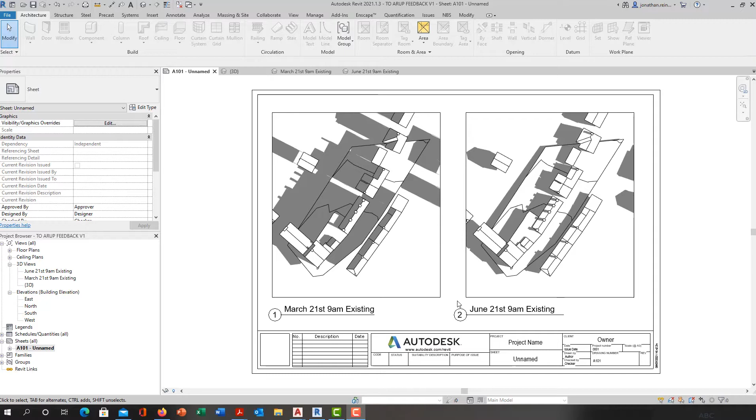The way we create this is, first of all, you need your 3D model of your building. We have our site here generated in Revit, with walls and roofs, just basic geometry created so we know it's casting the shadows. We don't need windows or internal walls for this purpose.

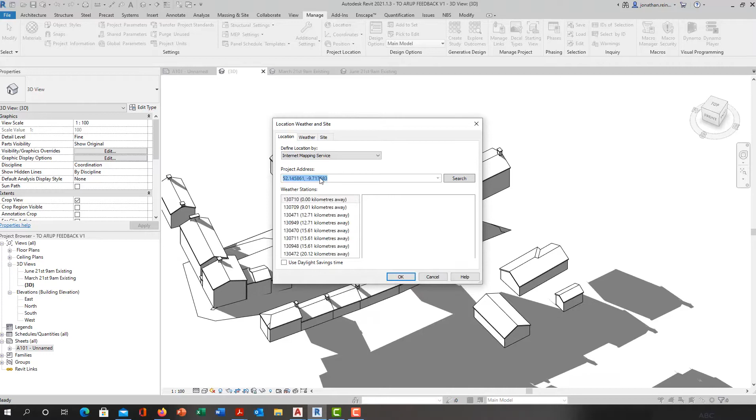The first thing you want to make sure is that your site is geolocated to the correct location, so Revit can interpret the angle of the sun casting the shadows. If you go into location, we have our coordinates placed here, based in the south of Ireland near West Kerry, Tralee and Killarney. So we know the shadow analysis will be as accurate as possible, with all buildings, roofs and walls modeled so the shadow generates correctly as the sun moves.

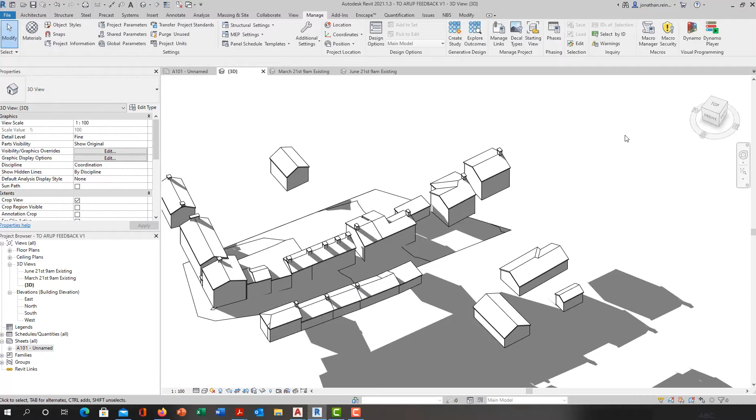The way we create the actual views is using a 3D view setup. We have a 3D view created here, just your default 3D view. What I've done on the left hand side is create separate 3D views for different dates and times. The way I do that is go to my top view and make sure it's facing north.

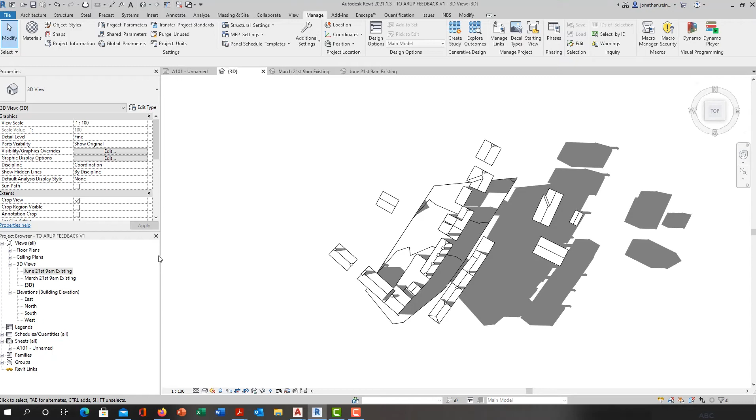Then what I actually do is duplicate this view. I'm going to name this one September 21st, 12 PM, so I title my 3D view as that.

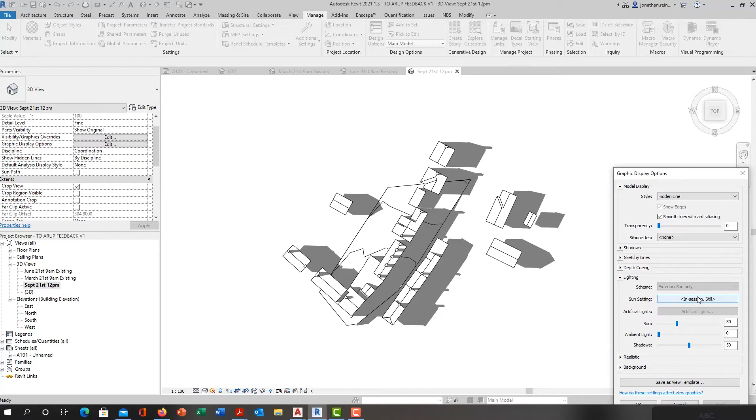Now I'm going to go into graphic display options, into lighting, and you need to do this for every view you create. Go to in-session still, and I'm going to change the date to 21st of September at 12 PM, set my ground level plane, and apply that. So there we have a view created at that particular date and time.

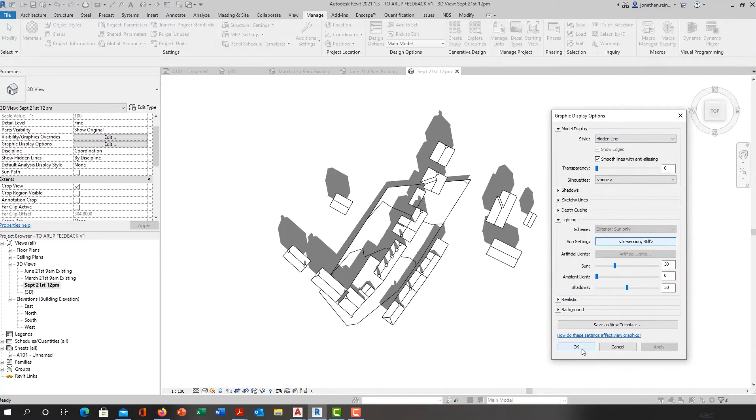The phase on that is set to show complete, phase 1, which is our proposed phase. So we're going to call this proposed. To create the existing one, you duplicate this view, rename it to existing, and just change your phase to show complete, existing.

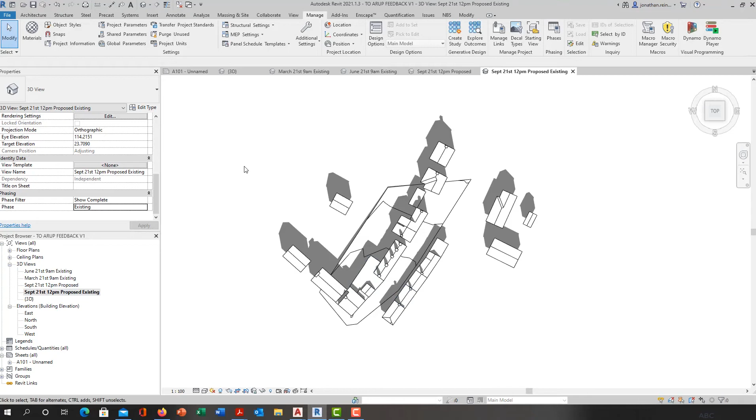We don't actually have a change of building here, but you would have a different building design based on phase. So in your proposed, if you haven't got your building model already, I'm just going to place some walls and set them to the proposed phase.

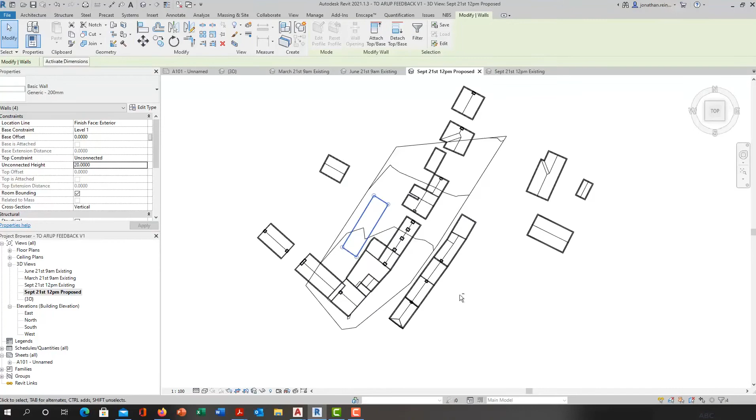So I'm just generating this as a fairly static building. I'm going to extrude these walls, make the height 20, set it to unconnected, and make sure it comes from my ground level. If I go back to my hidden line view, you can see that building is generated.

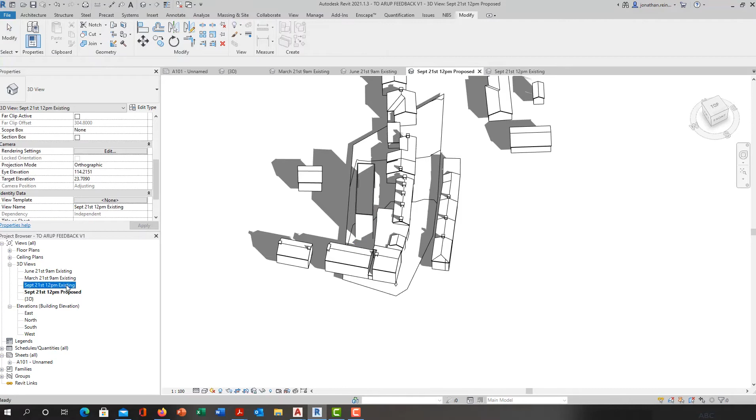I want to make sure that building's phase is set to created, phase 1. If I go to my existing phase, it's not turned on. Going to my top view, I can see the different type of shadow being generated by that building.

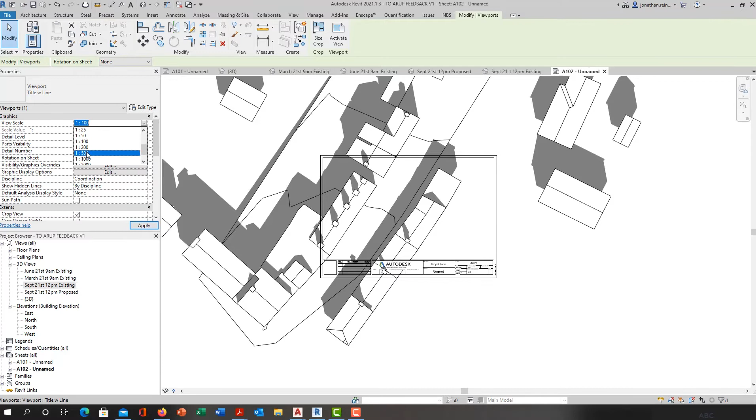What I can now do is start to place this on a sheet. Create a new sheet, and drag these views onto the sheet. Obviously your scale is too big, so I'm going to change this to 1:500 and set your scale.

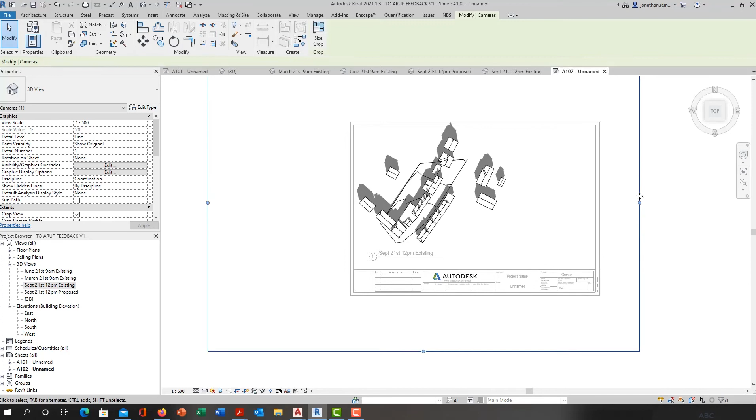Set your title block, and your title is going to align with your date and time if that's how you have it set up. I'm going to crop that particular view using the crop region, and make sure I'm hiding the adjoining site since we don't need it, as our site is just at the center of this building. So click out of that, and what we have now is September 21st, 12 p.m. existing.

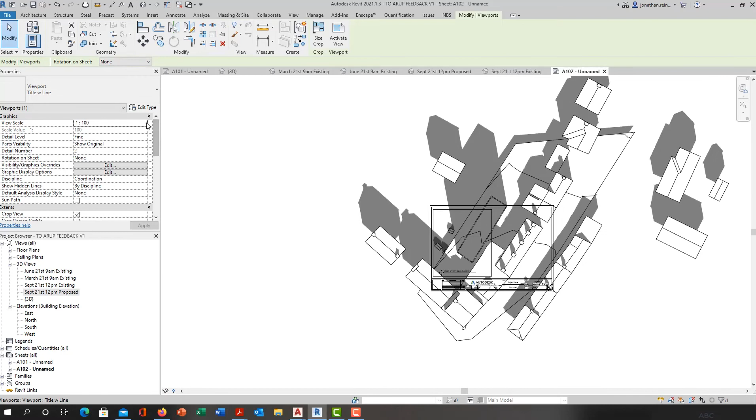I'm going to do the same for this other view, setting it to 1:500 as well. The purpose of this is that you can duplicate every time you create an existing phase at a different time and date. You could even have the crop region already created within that, unlike what I've done here, saving you from doing it for each one.

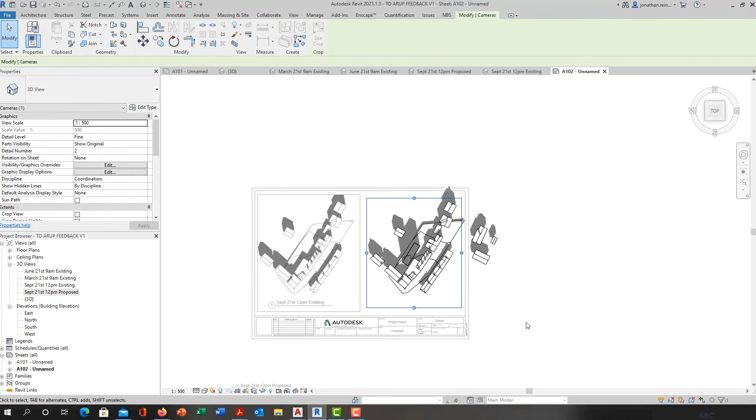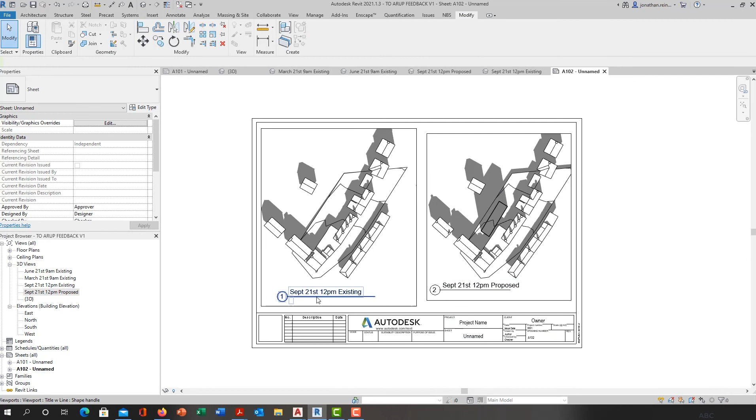You can duplicate this for all your different times of the year and create your various sheets. You could name this sheet September 21st, 12 p.m., so the existing and proposed sit on that sheet, allowing you to create one for every duplicated view needed at particular times of the year.